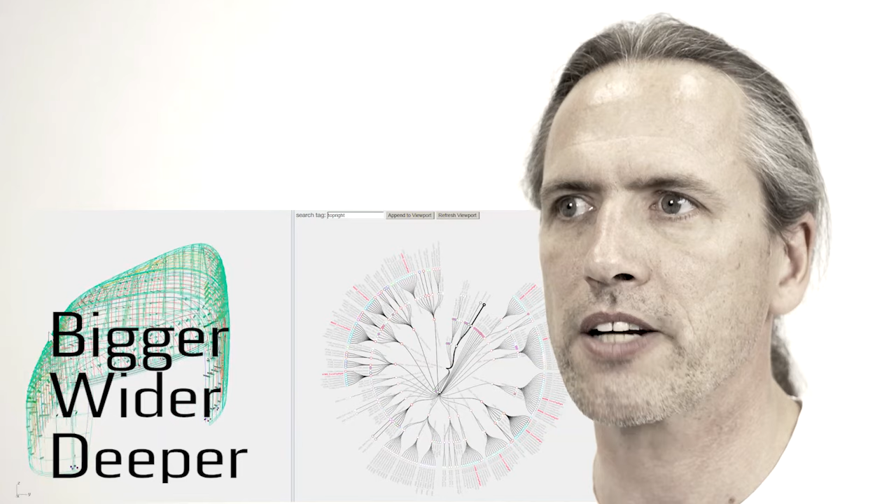In architecture, we are increasingly able to incorporate real-world data into our design practices. But this means that our models get bigger, wider, and deeper. This challenges the infrastructure that underlies the contemporary architectural profession. Architects and engineers need to find new models and methods to engage in these data-rich processes.

At CITA, we've been investigating and developing these methods within the ongoing Complex Modelling project, which is a blue sky project funded by the Danish government. Several of the sub-projects within Complex Modelling have explored machine learning as a way to better use data-rich environments.

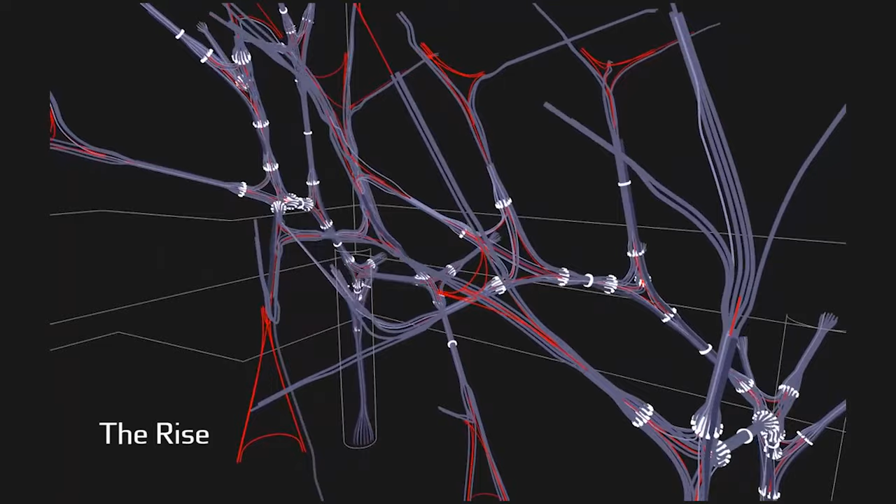In the early exploratory stages of design, we've investigated the use of machine learning to cluster the large solution spaces that computational tools create, so that designers can focus on the most interesting solutions. In more detailed stages of design development, to provide structural feedback in areas where traditional finite element calculation would fail, and in informing fabrication by synthesizing data on material and its performance with the fabrication requirements.

The recurring problem on these projects has been the necessity to tailor machine learning and pre-processing to each project, the lack of existing tools, and the limits of desktop computation. This was the beginning for the Forge project.

Our collaboration with Autodesk was about testing how the Forge platform could help us to overcome these problems. For this, we developed our own software based on the Design Automation API. We could indeed overcome some of the problems using Autodesk Forge.

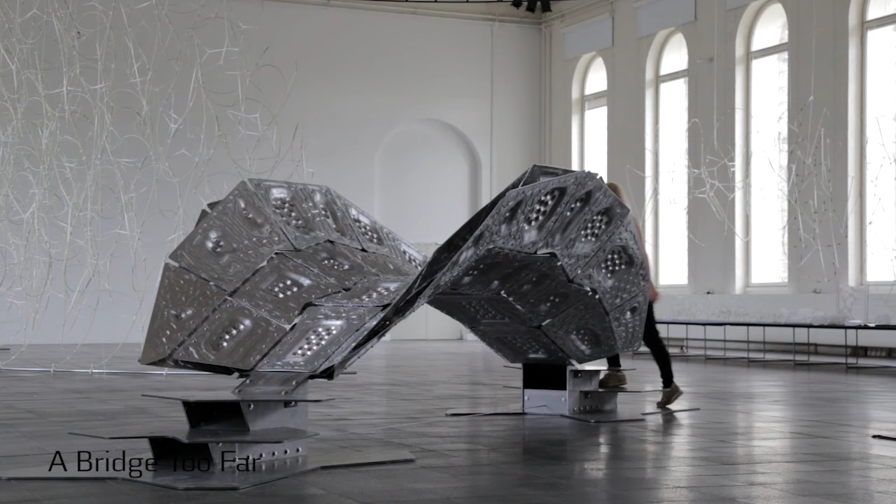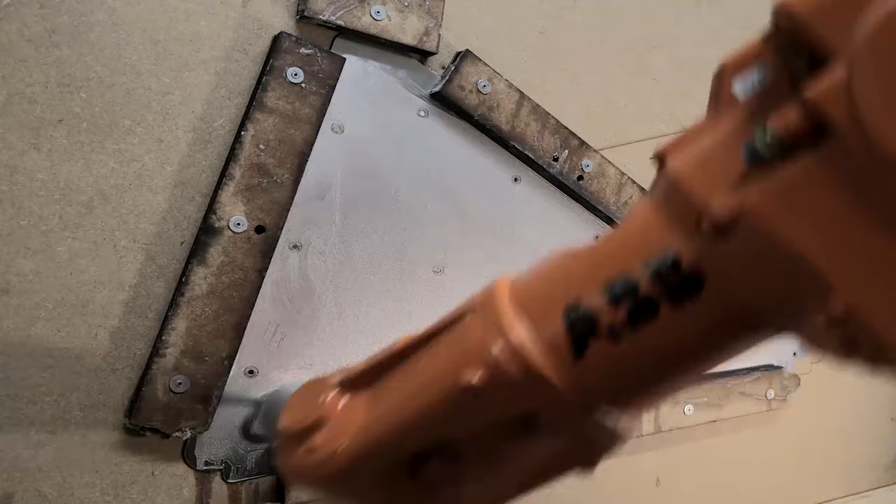We used the ongoing CITA project A Bridge Too Far as a testbed and extended its scope. The project investigates digital fabrication and the use of robotic incremental sheet forming to rigidize very thin sheet metal and make strong, lightweight structures. The machine learning problem lies in the fabrication process.

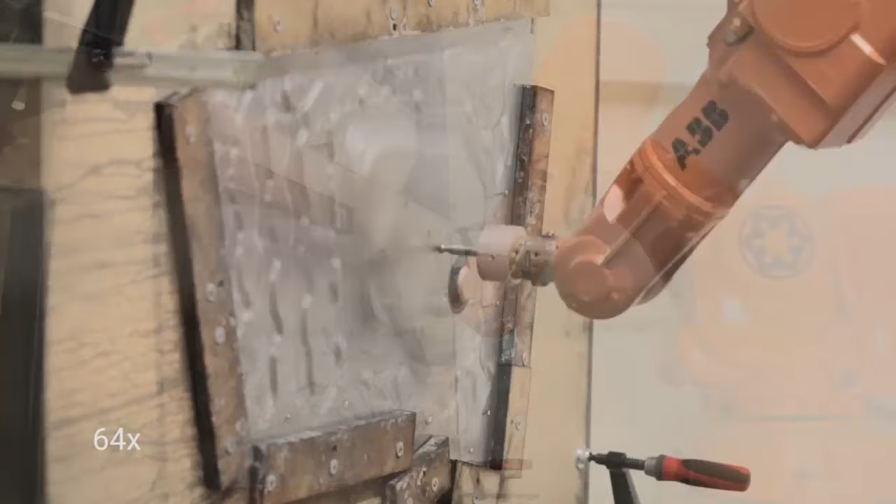The benefits of using two robots is that we don't need molds and can customize the forming of each panel. But there is a drawback, which is that springback becomes a problem. Springback is the tendency of the material to return to its original shape.

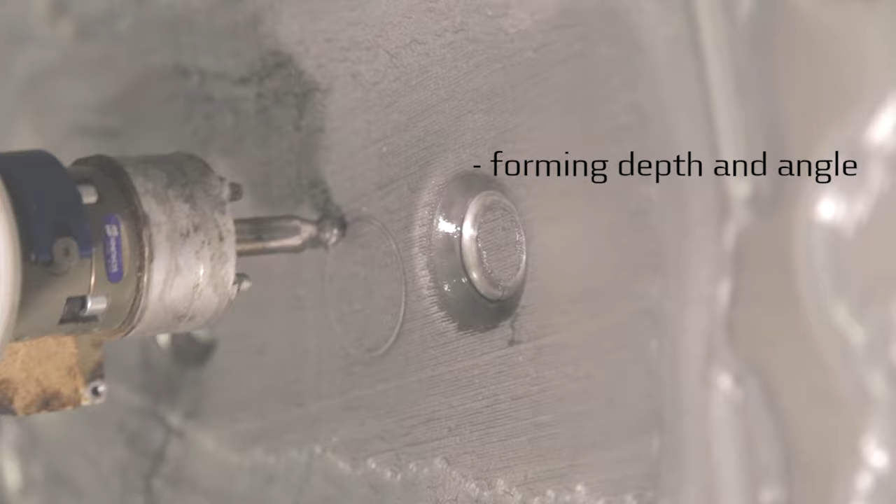As we were making prototypes, we were able to observe that multiple factors appeared to play a role: the depth and angle of the forming, the proximity of the tooltip to the frame, irregularities within the material itself, and the calibration of the robot arm and the moment frame.

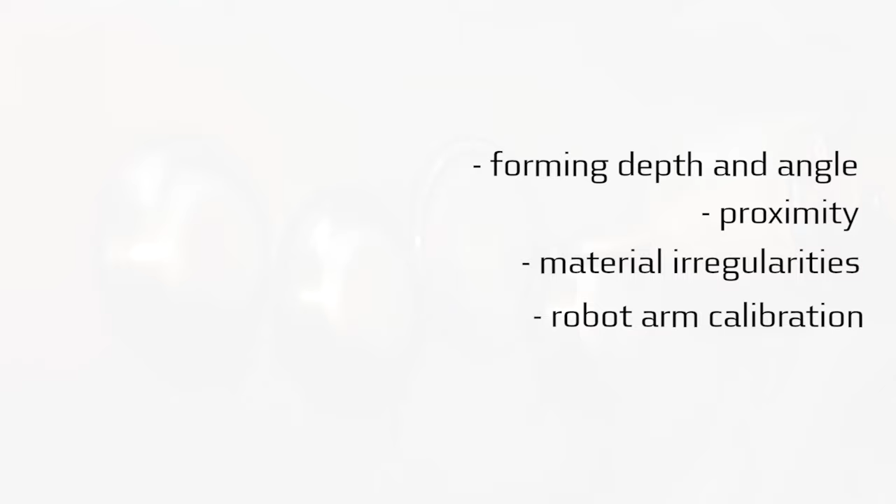We realized that it wasn't possible to model the high level of interaction between these factors using conventional mechanical models, so instead we looked to supervised machine learning.

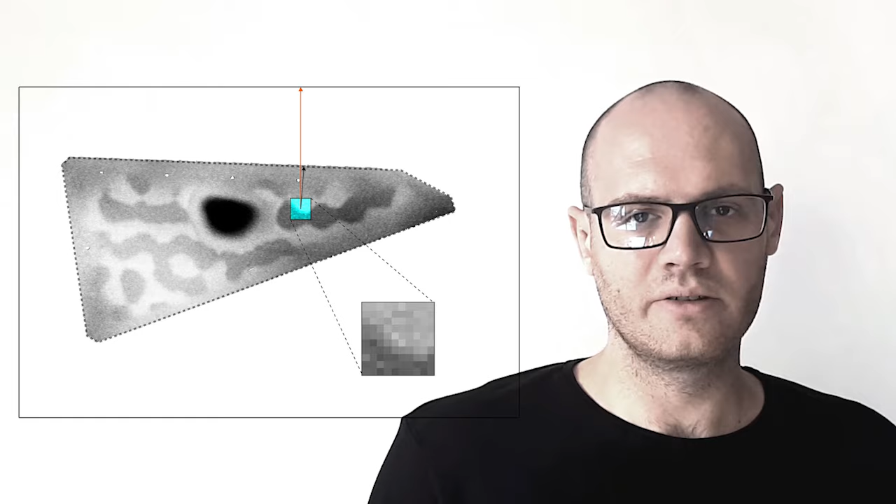The basis for the machine learning process was a supervised neural network. We trained this neural network based on the 3D scans of the panels compared with the measured deviation from the 3D models. The resulting data was encoded as a depth map, from which we gathered thousands of samples.

Those samples were used to train the neural network the material behavior so that it is possible to predict and correct for springback. The amount of samples greatly influences the precision of the neural network predictions. Because we were working on local machines, we had to limit the number of samples we could process.

Moving from the desktop into the cloud, we used Forge Design Automation API to develop a massively scalable solution. Our process now consists of 4 steps: initial modeling process and fabrication.

The discretization, that is translating the fabricated and the target geometries into a dataset, done using a custom Forge application. Learning from the given samples using the TensorFlow framework. Model adjustment step performed.

A flexible solution for this task was created, running AutoCAD Core in the cloud, coupled with the OWL library. This can scale up seamlessly with new problems given.

The workflow consists of 3 .NET applications, easing the process of creation, setup, and use of a custom Forge application: App Command, which is the application running in the cloud; App Creator, which helps set up the application; and finally the App Client, which runs the application.

Our predictions had much greater accuracy, which meant that we could not only implement better corrective methods, but also explore a wider range of design options and geometries with more confidence. Machine learning combined with cloud computing provides a powerful model to the architectural profession.

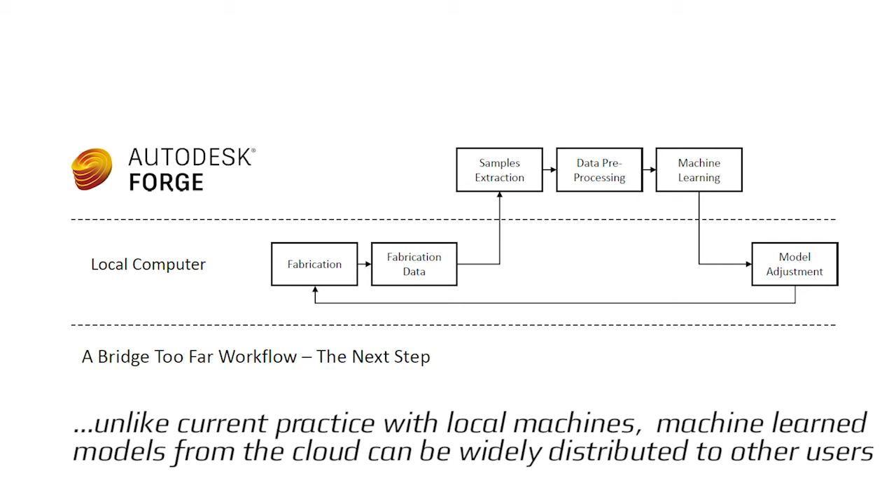A promising next step would be to move the machine learning itself into the Autodesk Forge cloud, where it could be widely distributed to other collaborators or users. With the computational power of the cloud, fundamental research questions about the use of machine learning in architectural practice can be addressed, and new modes for creative engagement and design decision-making developed.